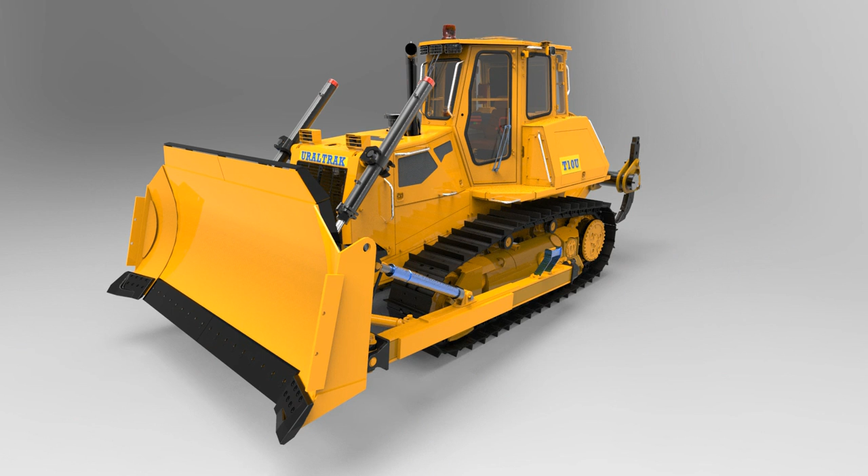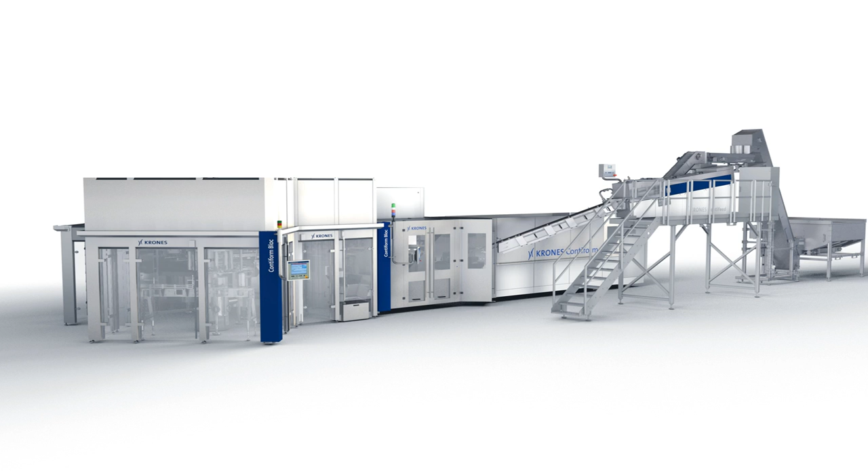Solid Edge continues to set the standard for streamlining 3D designs of products, whether they're a single part or an assembly of over 500,000 components. In this demonstration, we'll show how Solid Edge ST7 speeds design of areas around a bulldozer engine.

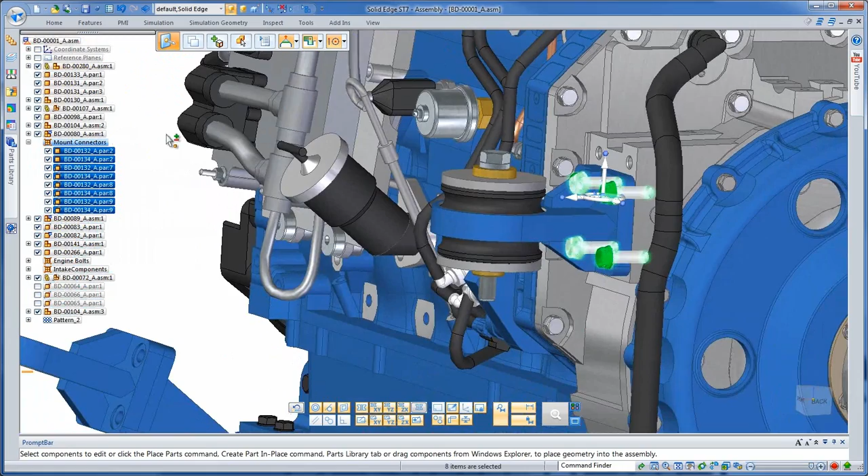First, we'll work on the engine mounts. This engine has 4 mount locations, and the appropriate bushings, washers, tension, and mounting bolts are organized into a single subassembly, which we've placed in one location. First, we'll grab the 4 sets of mounting bolts and washers by selecting one set, then use Select All Identical Parts to include the other 3.

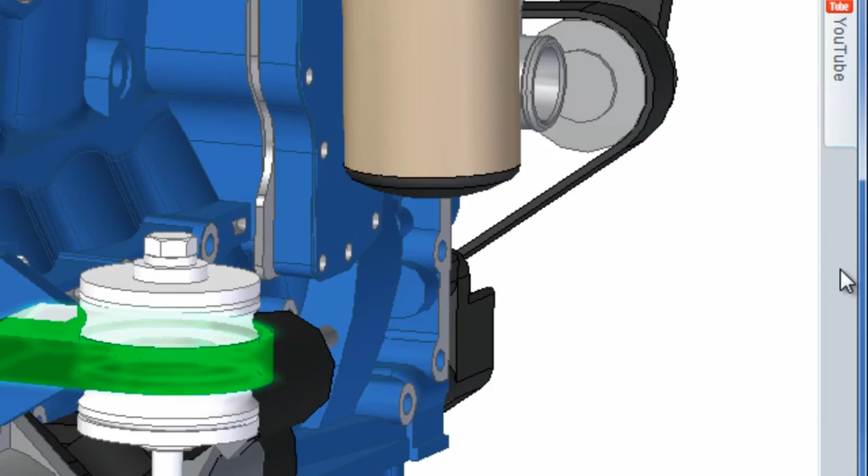We'll also select the tension bolt, washers, and bushings within the mounting assembly. Watch as we use Duplicate Components to copy all of the selected hardware from the initial position to a second position. Note the preview of the duplicate. A valuable option within this command is Select Matching Occurrences, which finds the 3rd and 4th mounting positions towards the rear of the engine. Very smart and very fast.

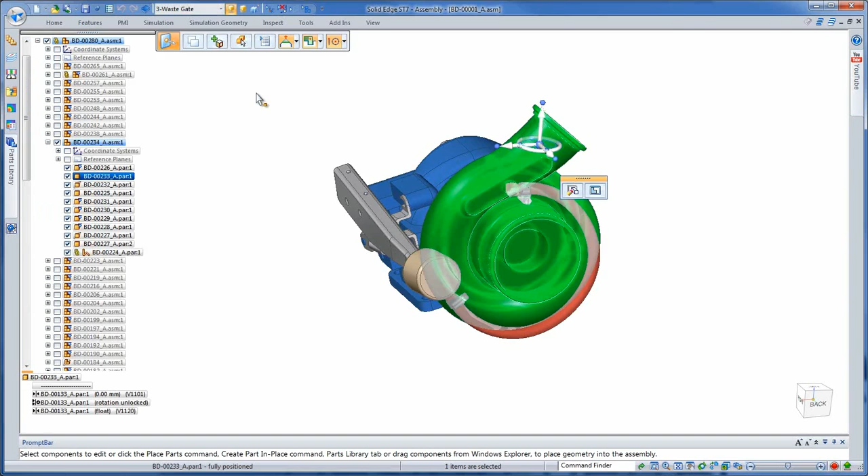Impressive real-time rendering capabilities are now available within Solid Edge ST7, courtesy of KeyShot. This easy-to-use but powerful application is integrated into Solid Edge for advanced photorealistic visualizations of your 3D design, without ever leaving the modeling environment. Again, working with the bulldozer engine, we'll open its turbocharger assembly.

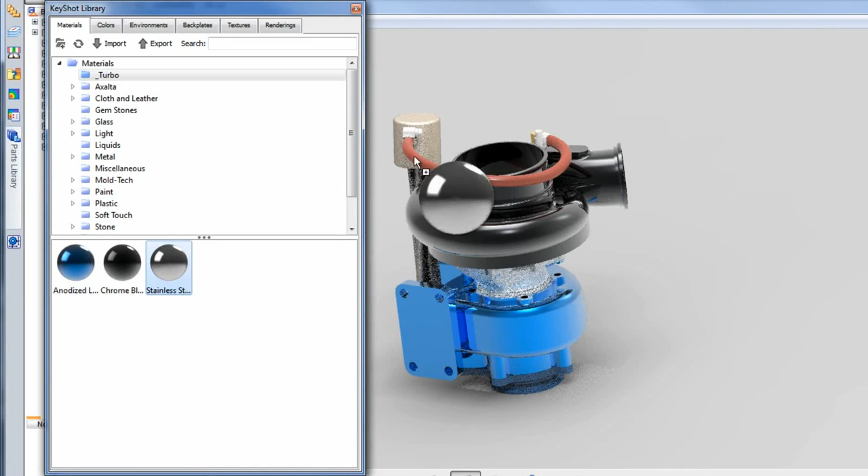KeyShot is available from the Solid Edge command ribbon and will open the turbocharger into a separate rendering window. Appropriate colors and materials are automatically transferred from the modeling environment, though you can also assign materials and colors from KeyShot, and watch the turbocharger update before your eyes.

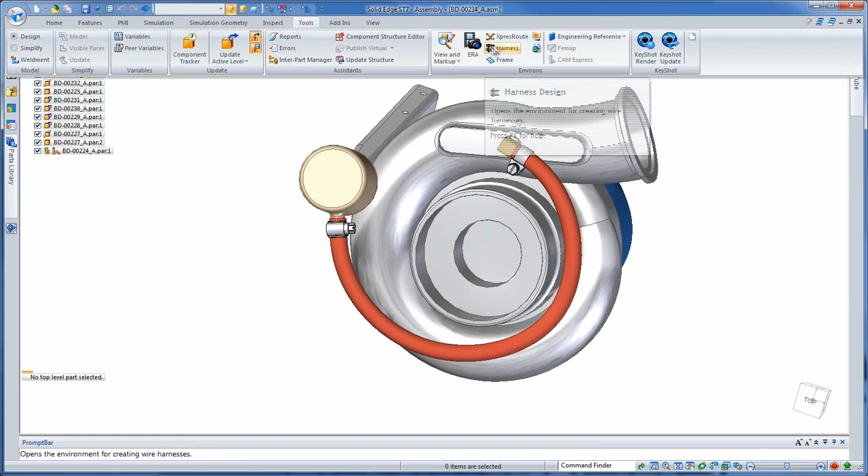Getting back to modeling, we want to be able to rotate one port of the wastegate tube. As we grab it and rotate, you can see the tube itself lengthens. In real life, this tube would be cut to a specific length and would not elongate. You can model that realistic behavior by editing the tube's underlying key point curve and selecting the new option, Curve Length Step. The new Fixed Length option allows us to define a finite length of the curve, which ensures the tube length is fixed as well.

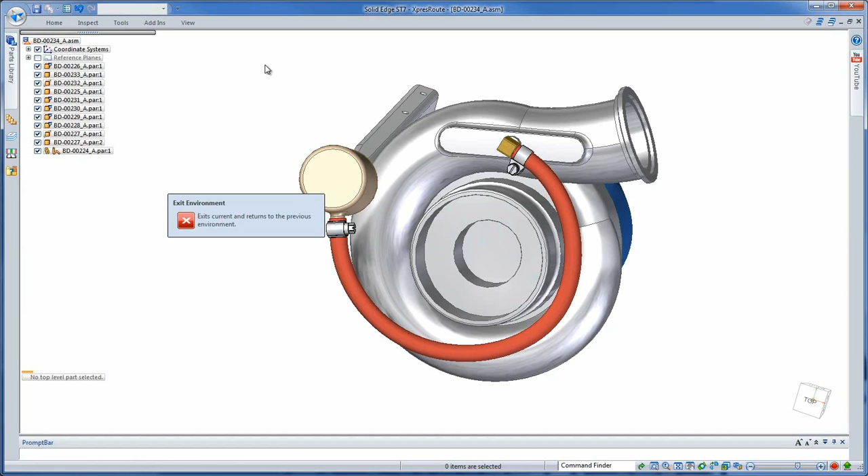We can even constrain the curve to only move in a specific direction, a great option to replicate conditions under which the turbocharger is actually maintained. So you can use the 3D model to develop maintenance documents for the real component. Returning to the assembly, watch as we rotate the intake port. The tube's length remains fixed as it would in a real system.

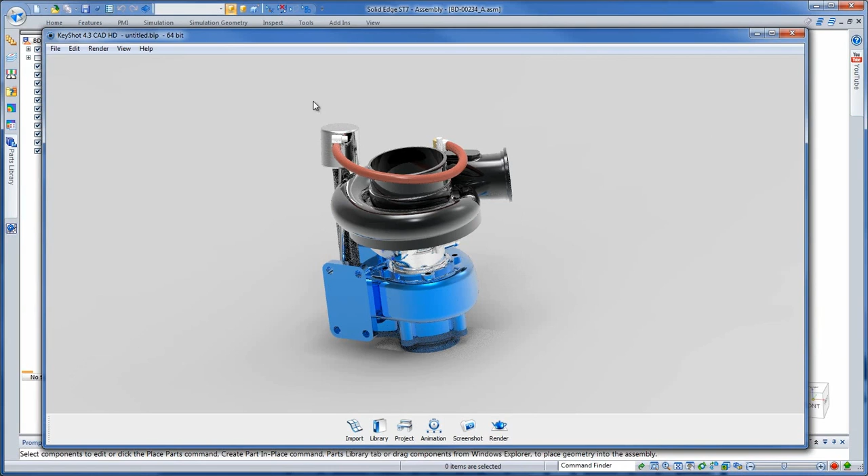Let's go back to KeyShot, but first we'll select KeyShot Update to ensure all of the model changes propagated to the rendering. The resulting realistic imagery could greatly enhance any equipment maintenance manuals.

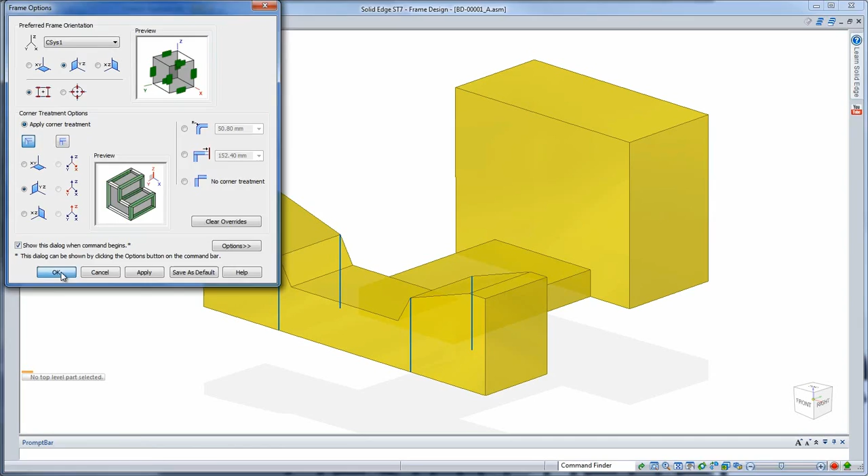Now we want to build an engine test stand. For this, we'll use the frame construction tools within Solid Edge ST7. We'll begin with a solid representation of the test stand and use the edges of these bodies to guide frame creation. The frame command allows you to set a preferred orientation so you get mitered corners placed how you want the first time. Select a solid body and Solid Edge automatically places members based on your preferred orientation.

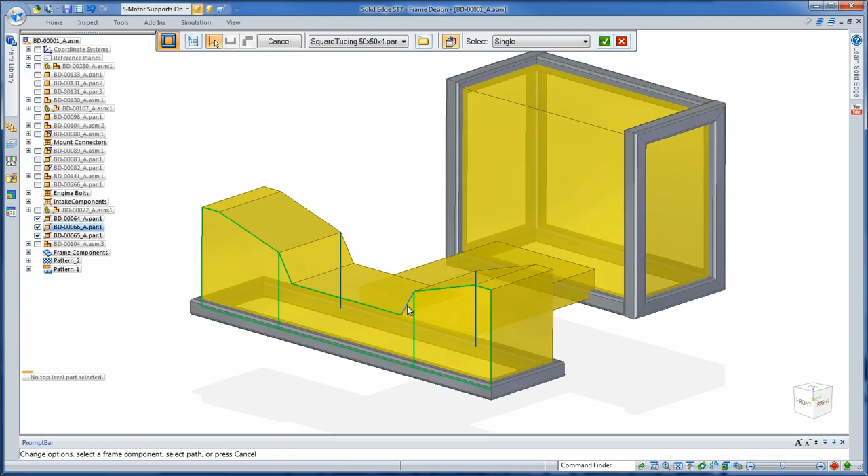Let's remove the center member so it won't interfere with the engine. While we're creating frame members, we can switch between single, chain, face, and body options to get the custom framework for our engine test stand. We'll place more members to connect the front and back of the stand.

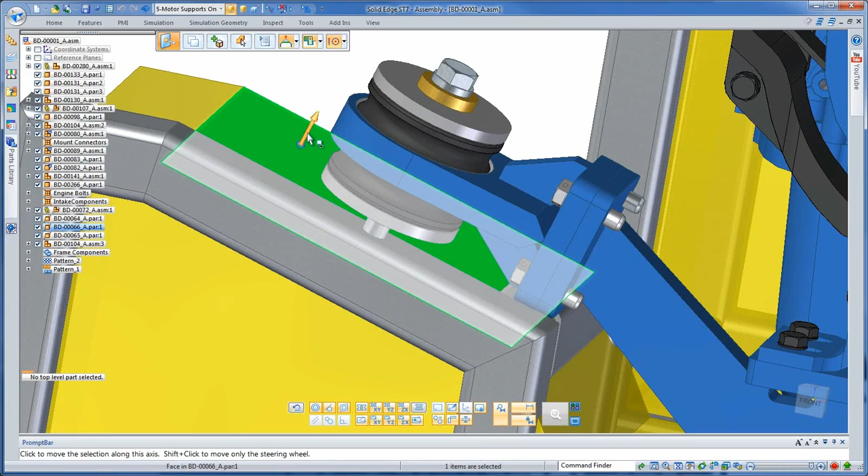Once complete, we'll display the engine and determine how it fits on the stand. In the front, the frame needs to meet up with these mounts, so we'll use Synchronous Modeling to move a face of the solid and thus the frame to match them up.

With ST7, we listened to our customers' needs and have delivered a fast, flexible, and more intuitive suite of product modeling tools, which allow you to focus more on your designs and less on the tools. Solid Edge. Design better.